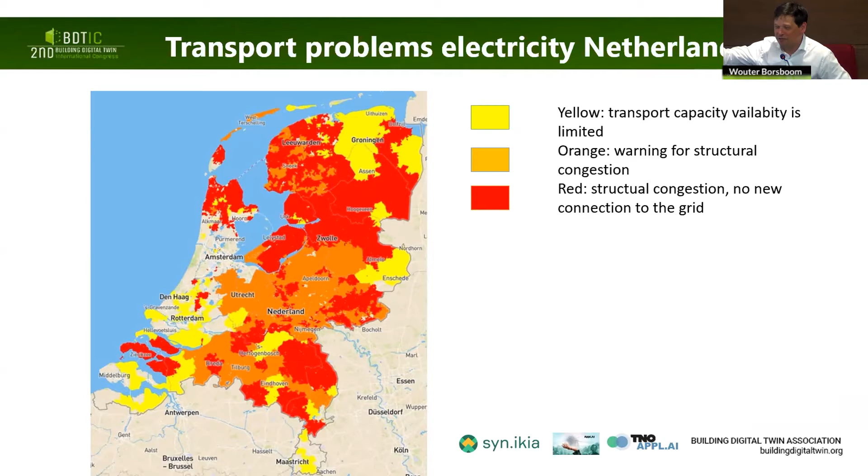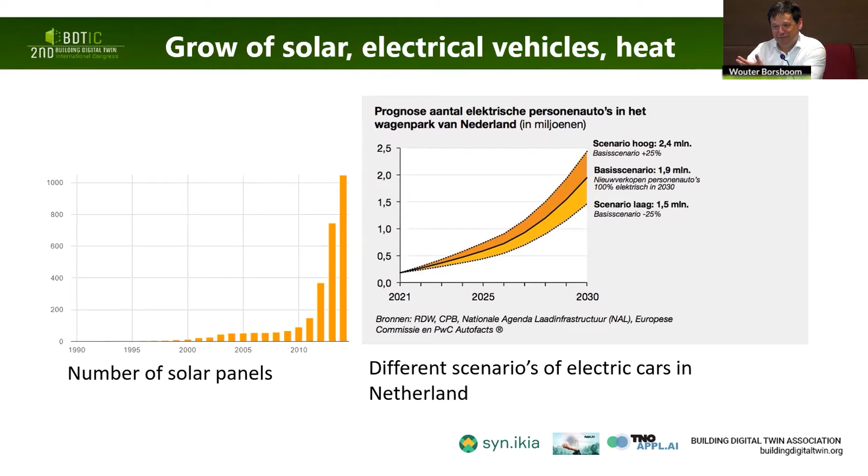But that's not all. You might say okay, half of the Netherlands is already red, but we're only starting, because here you see the growth of solar panels - that's supply - and demand is the amount of electrical vehicles charging. It's growing exponentially. We have a big apartment building sold for about €8,000 per square meter, energy neutral in Amsterdam, very good. But they will install diesel generators because they only get half or a third of grid capacity. So maybe you can't connect all your fancy stuff in a very expensive apartment - you have to survive. I think this is one of the challenges.

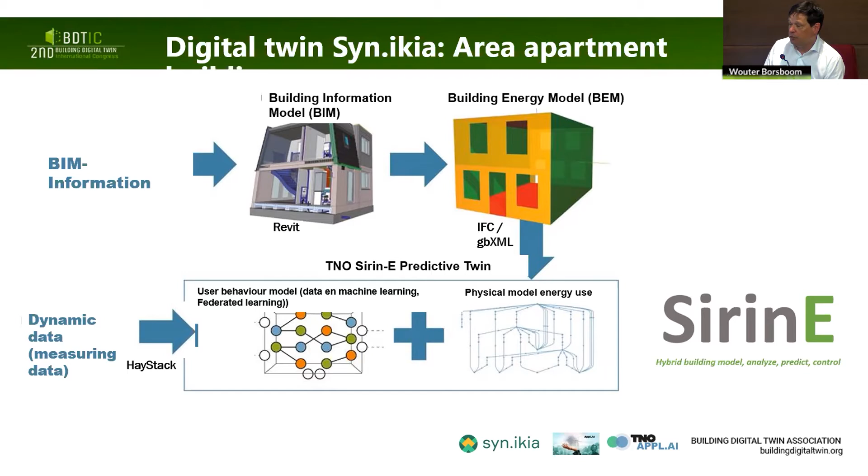What we try to do is use physical models for things we already know, like solar radiation heating things up - we use physical models for that. But for user information, we use behavior models because there aren't many physical links there. We use artificial intelligence and combine both approaches. On one hand we have the BIM model, which we convert automatically to a heat network model, and on the other hand we use dynamic data to calibrate the models.

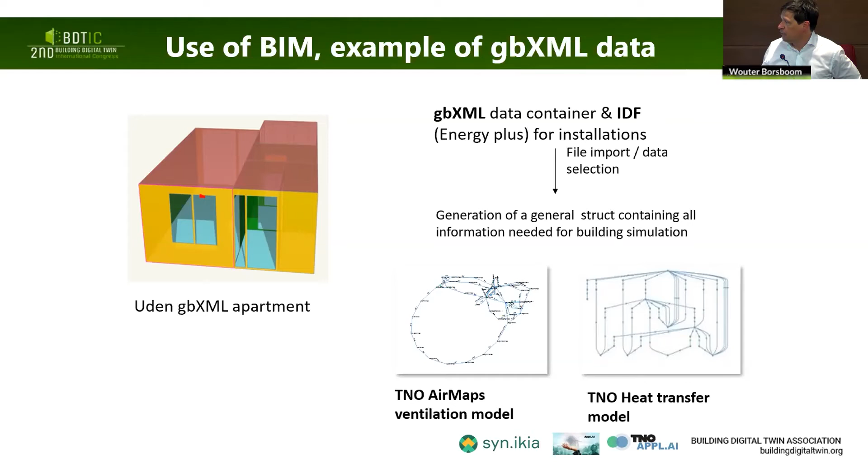This is a bit how it goes. We have the gbXML model, and we can also work with IFC for geometric data. We use IDF as an import file for EnergyPlus to capture the relation between equipment and zoning. Then we automatically generate a ventilation model and a heat transfer model, which can be used for model control.

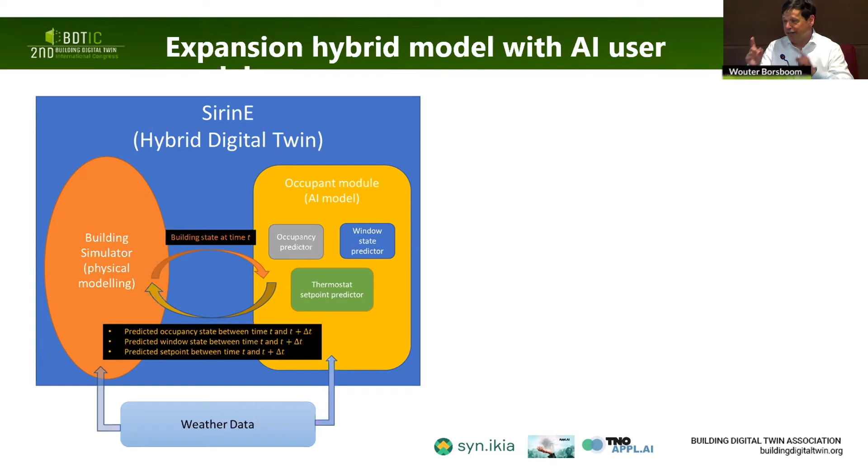I'm showing a bit of the interaction: on the left side we have the building model calculating temperatures, and on the right the AI model, interconnected. For the next time step, it uses the calculated indoor temperature - for instance, are people going to open the window or not? Based on a Markov chain we use for the window state predictor, we can estimate if the window is open or not, based on the calculation in the physical model. So it interacts quite rapidly using better data and input.

This is a bit of the presentation - do I still have time? Okay. This is all open source, and we use gbXML because it was quite popular two years ago when we started, so you have open source viewers for gbXML. What's quite fancy is when you click on a wall or window, you can see the physical properties, so you can easily check if the gbXML model is correct or not.

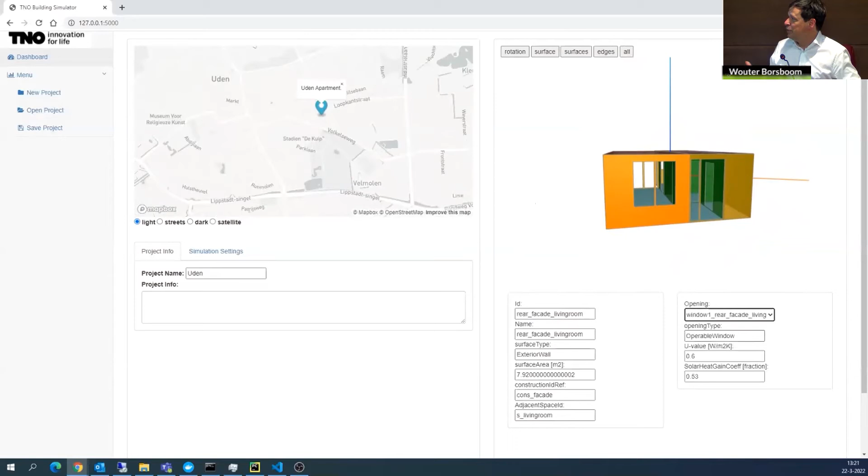Then it automatically calculates the energy prediction for indoor temperature, which we use for our MPC calculation. So this is how our MPC works: we have a price signal - for instance, the availability of solar. Based on solar prediction, we say okay, that's the price signal, and we use that for our optimizer. We have a connection where above is the digital twin, underneath is the physical building, and we also check with state feedback if the model is still in sync with the physical environment.

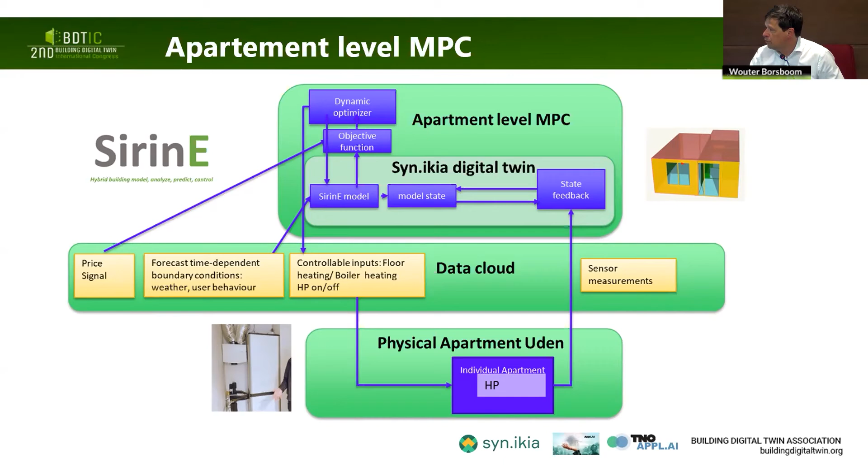Another aspect is the assurance of privacy - we had an excellent workshop by Pablo this morning about this. But what's really important is if we have something at DSO level or maybe a facility manager seeing the outcomes of the model, like shutting off the heat pump or turning it on, we want to understand it. There must be feedback from the model to the consultant to build trust. We also need to know how reliable the model is - for gas network models, we say based on the accuracy of the sensors, this is the accuracy of the prediction. That's really important, because you can have ten good results and one bad, and people lose trust and won't use it.

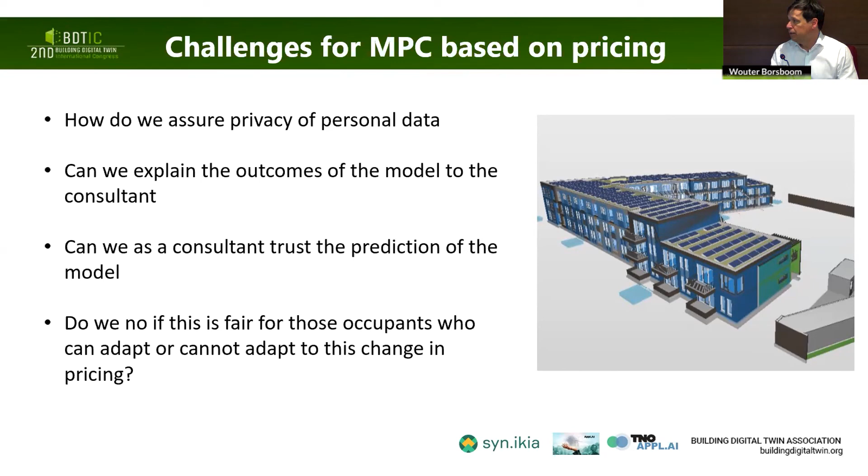With the common congestion problem, some people will be able to react to a certain price signal and others won't. I think fairness of such an MPC, and the people who don't have it, will be quite interesting. Also, when we have AI or black box models controlling such an environment, it's important that it is fair to the users of such a model. I think that was the presentation.